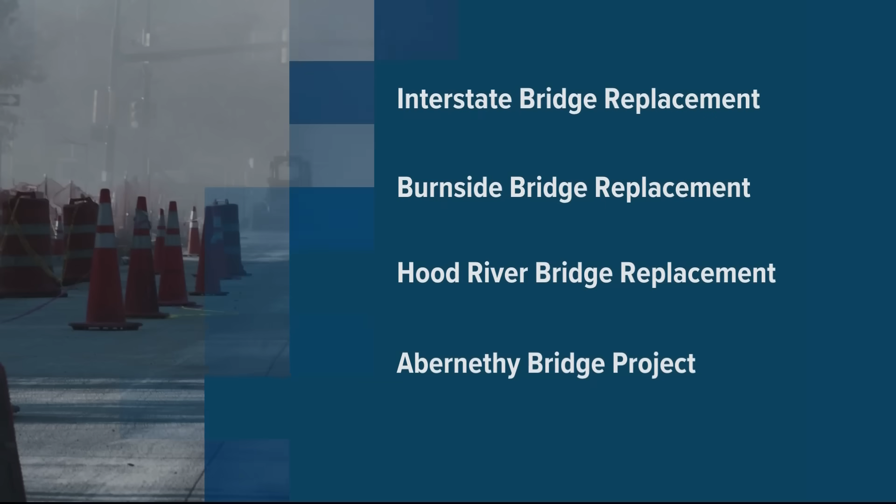But we're going to show you what's going on with 4 other big projects in the region: the Interstate Bridge Replacement between Portland and Vancouver, the Burnside Bridge Replacement, the Hood River Bridge Replacement, and the Abernethy Bridge seismic retrofit in Clackamas County. Abernethy is the only one that's actually under construction. That got underway in summer 2022. So let's start with that one.

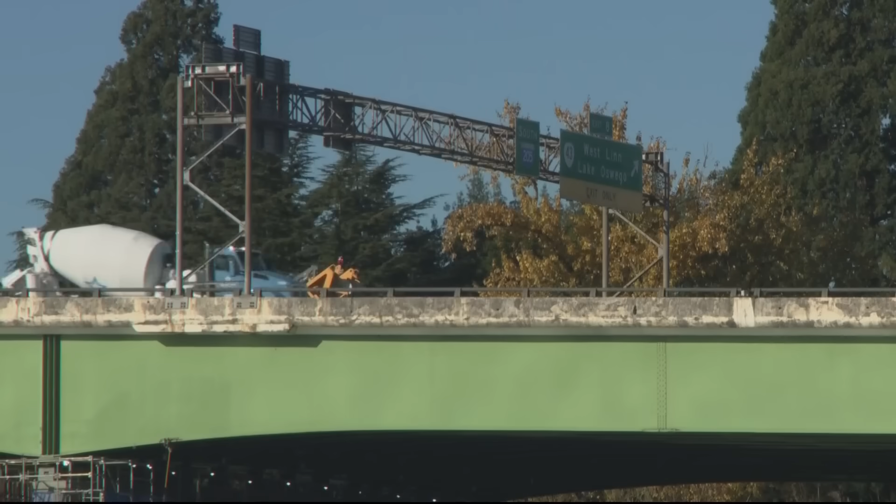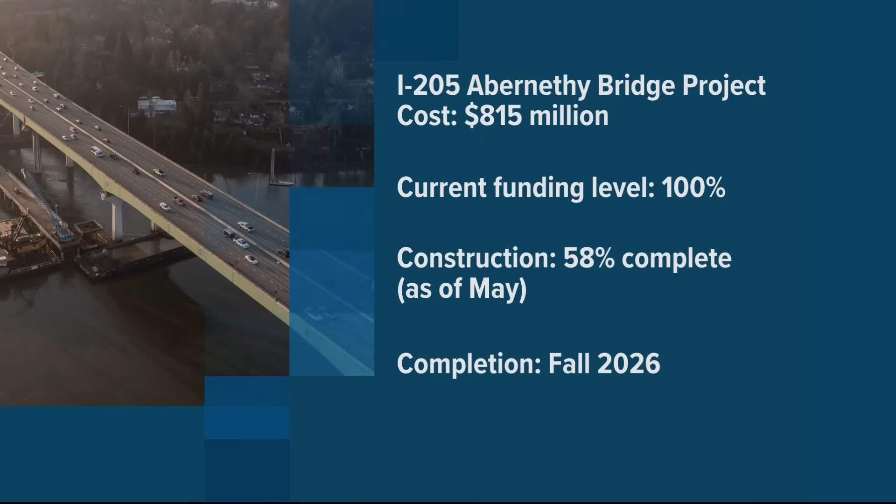It's a large-scale retrofit, transferring the whole bridge deck to a new set of support columns that can withstand a major earthquake, and widening the deck while they're at it. The project will wrap up next fall, at least if nothing else goes wrong. Inflation and engineering and construction problems have already caused delays and nearly $300 million in price increases since 2021.

Abernethy is mostly funded by bonds using money from the last state transportation package in 2017. The cost overruns mean it's eating up much more of the 2017 money than it was supposed to, leaving less available for other bridge projects in the years to come. During this past legislative session, it was often mentioned that Oregon needs to replace about 1,000 aging bridges in the next few decades. Right now, we're averaging 3 per year.

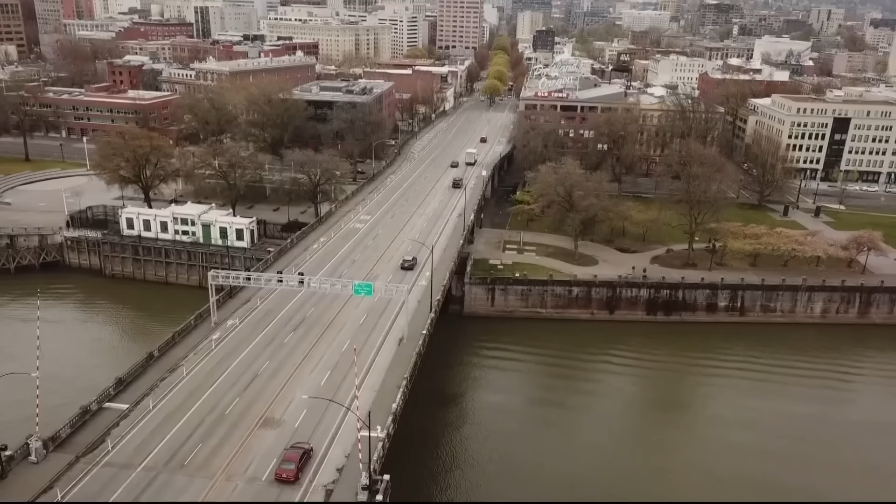Long way to go. Heading north, let's check on the Burnside Bridge. This one is a full replacement, and the project will start by tearing down the current bridge so the new one can be built in the same place, which means there will be no Burnside crossing available for about 5 years. The start of construction was recently pushed back from 2027 to 2028, a delay that Multnomah County blamed on uncertainty at the federal level.

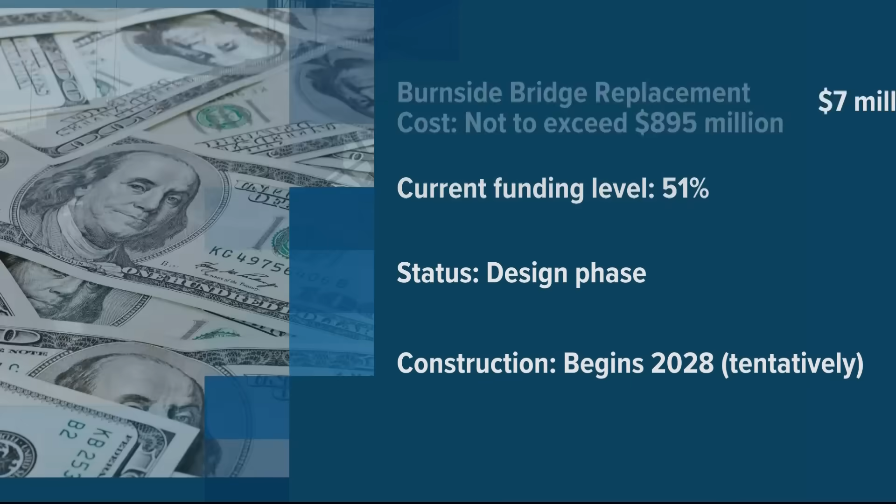There's quite a bit of funding still needed for this project. They've received $7 million in federal funding so far, but are hoping for an additional $450 million in another federal grant to get the project fully funded. The county applied for it last year and struck out. Last week, county commissioners voted to try again, though there was some acknowledgement that the odds feel longer this time around, and not wanting to waste staff time if it's a lost cause.

In light of the federal administration, I am glad we're applying. I think that is the right thing to do. I appreciate our realistic expectations. I just am wondering how all-consuming this might be for your time. Yeah, I think we're realistic about our chances to be competitive for discretionary grants with this current federal administration. It didn't take that much staff work because we've already done it before. It took a little cleaning up. So if it really took a lot of staff work, I'm not sure the benefits would outweigh the work, to your question. But in this case, it does.

So we'll see about that grant, but you get a sense of why construction was delayed to 2028.

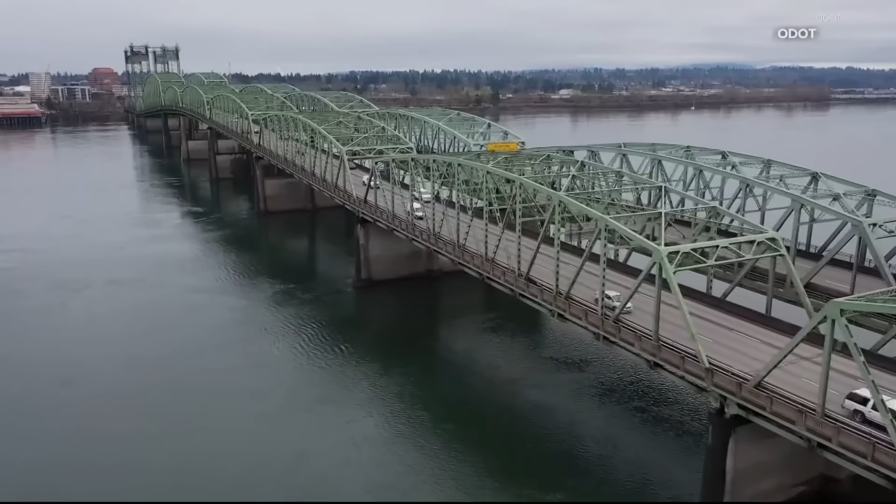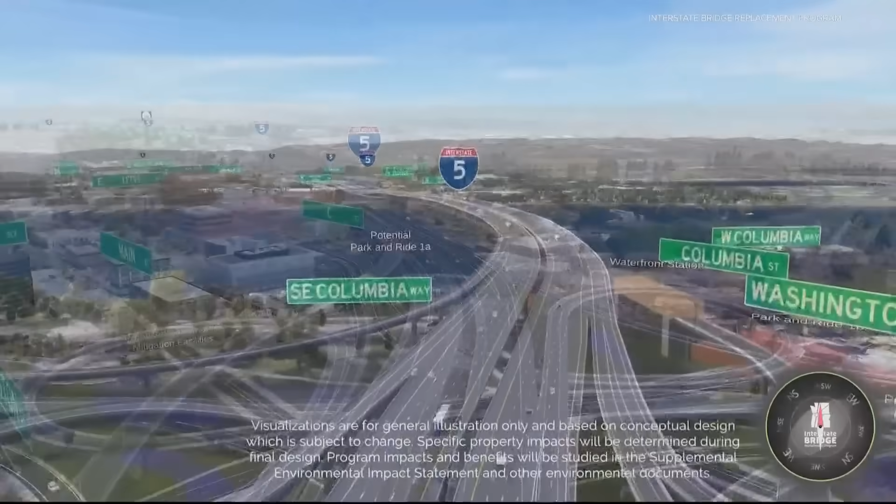Now to the biggest of the bunch in our roundup, the Interstate Bridge Replacement. It's a full replacement of the twin bridges that carry I-5 over the Columbia River, including a light rail extension to Vancouver. In 2023, the price tag was $6 billion. There's an updated cost estimate coming later this year, and it's widely accepted that the price will be much higher. The project team wants to start construction next year, but there's a lot that needs to happen before then. The project is still going through federal environmental review, which is supposed to wrap up this year.

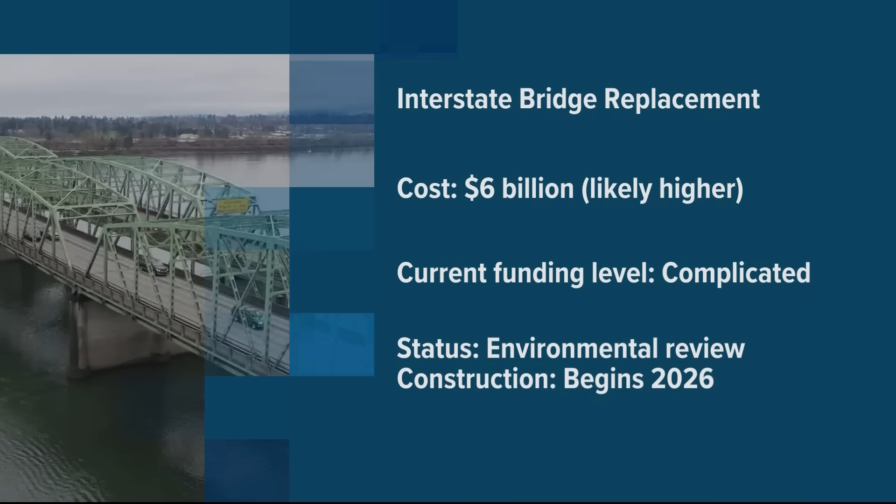We're also still waiting on an answer to one of the most fundamental questions about the project: will it be a drawbridge? That's what the U.S. Coast Guard wants, and the project team has been trying to convince them to change their minds for about 3 years now. But they're running out of time because they can't finish environmental review if they don't know what they're building.

On the money side, the project does have a couple billion dollars on the line in federal funding and an application in progress for another $1 billion, though none of it is from the specific program that rocked the Rose Quarter project. So things appear to be okay for the Interstate Bridge project at the moment. But let's wait and see what that new cost estimate says this year, because that could have serious implications for what happens next. Now, about those tolls, Kotek's pause on tolling includes an exception for the I-5 bridge, so they're coming. They're going to start on the current bridges while the replacements are being built. Right now, that is scheduled to start in 2027.

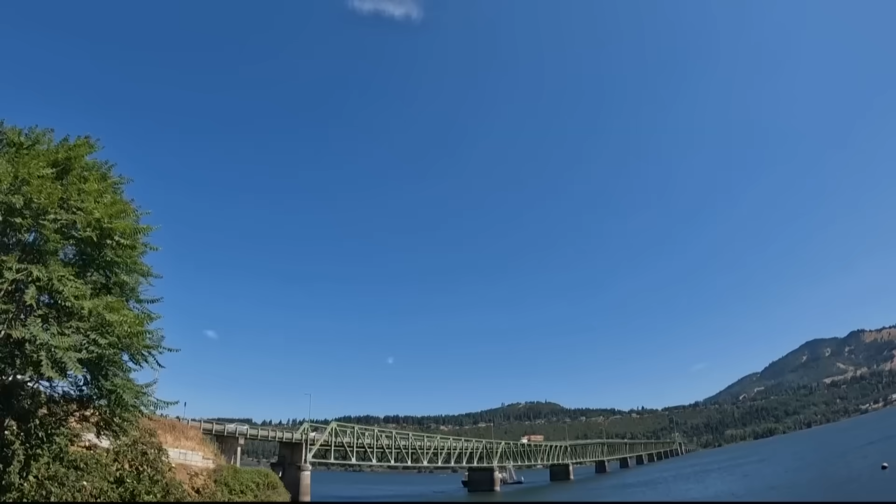Finally, let's head east to look at the replacement Hood River Bridge. This is another full rebuild aiming to replace the current rickety drawbridge with a higher-up fixed crossing with wider lanes and a bike and pedestrian pathway.

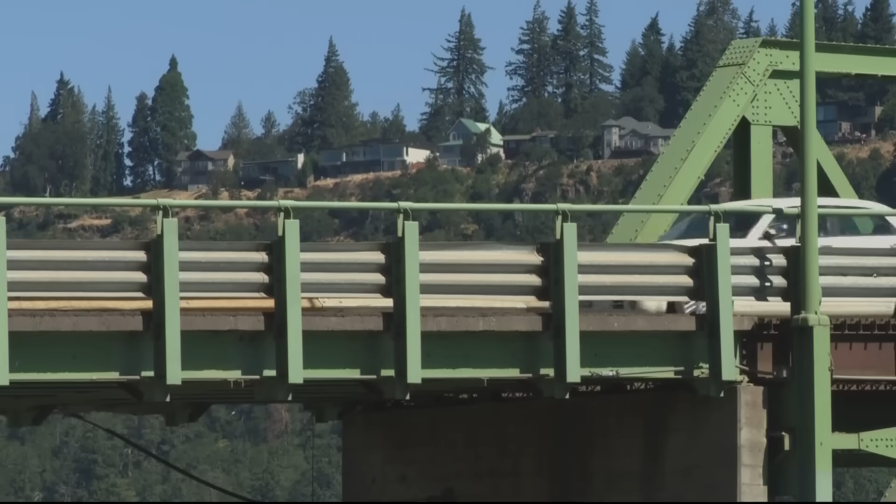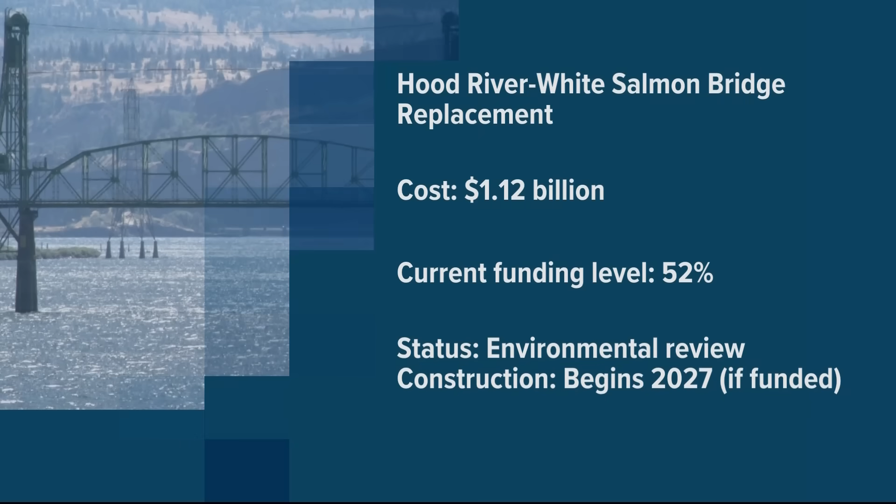The governor's tolling pause only applied to future tolls, and the tolls for this one are already in place. They cover maintenance on the current bridge, and they were hiked a couple years ago to start raising money for the replacement. Last week, the bridge team signed a contract for full design and engineering and are hoping to start construction in 2027, although that will depend on whether they can secure the rest of the funding. They're about halfway there at the moment. Money from the state of Oregon was pointed towards this project during this last legislative session, despite a full transportation package failing to pass. The project is planning to apply for a $500 million federal grant to cover the rest.

So there you have it. Despite the bad news for the Rose Quarter project and the big question mark around the future of transportation funding in Oregon, the other 4 mega projects are still standing. Though with the exception of Abernethy, they're each still in need of another large federal grant before years of planning and design can become reality.